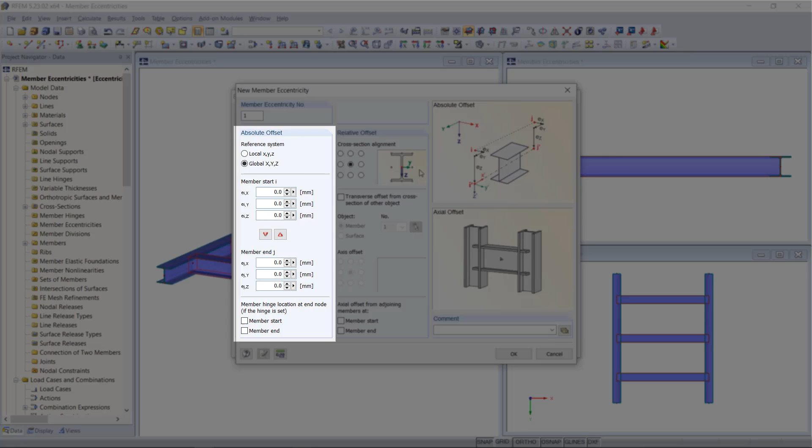So basically we have two options. We can set either an absolute offset or a relative offset. With the absolute offset we can manually enter a certain value, for instance in reference to the global axis, as the absolute distance to the previously used system lines. Let's say we want to move the members upwards in the global Z direction, so we just have to enter an eccentricity, for instance of -200 millimeters for both the member start and end.

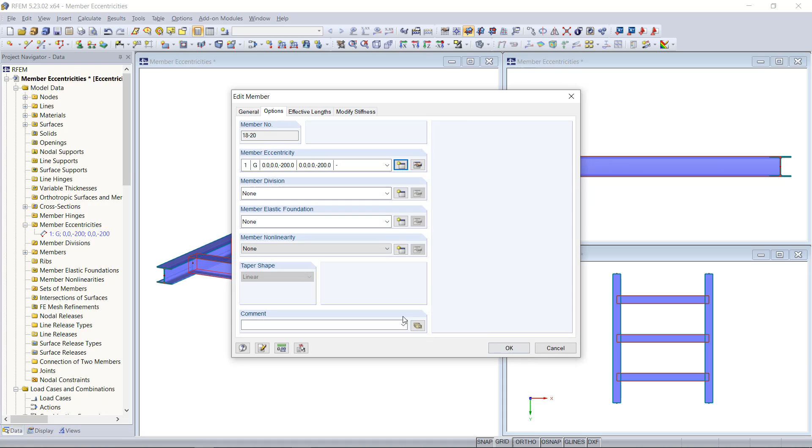Then we click OK, and now if you have a look here at the side perspective, if I click OK once again, the beams are placed upwards. In the wireframe model we can see that even better, so here you can see the connection.

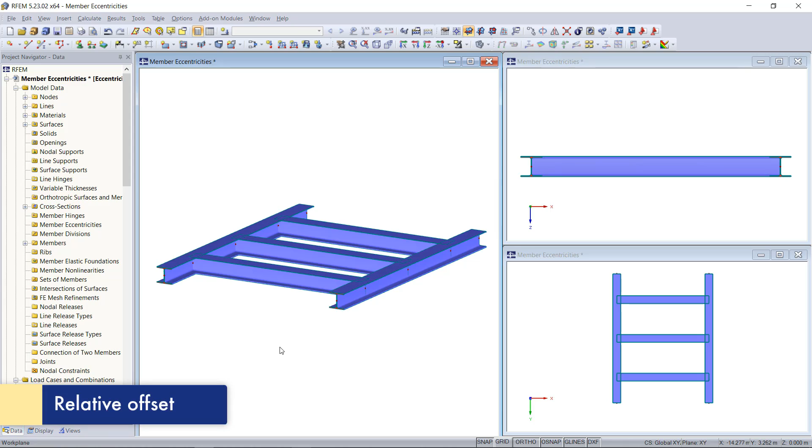The option Relative Offset allows us to create eccentricities for certain members depending on adjacent members. For the case that these members here in the middle should be flush with the other two beams on the right and left side, we can use this option. We can also enter the dialog for eccentricities directly using the project navigator, with a right click on member eccentricity, and then we choose new member eccentricity.

So by defining the point in the middle of the top flange, as shown in the figure on the right side, we can attach the middle beam members with their top edges to the other beams. So we click here on transverse offset and then choose the reference member out of the model, and then as axis offset we select the middle point down here.

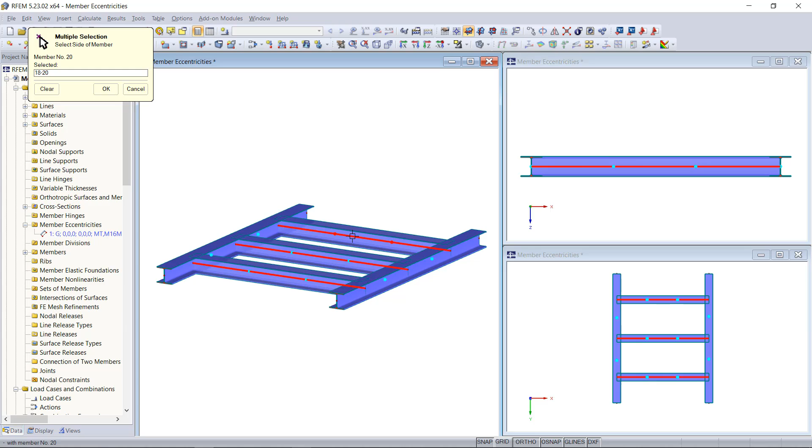So right now we have created the eccentricity, and as a next step we have to assign it to the members. We can do this with a right click and then choose assign members graphically. In order to select the entire beam member, try to click in the middle of the members, like here, and then we click OK once again. So as you can see, the beams are automatically moved and we've just created a flush connection between the members.

It's also possible to edit the eccentricities if we right click and then choose Edit. Let's say this time we need the bottom edges to be connected to the top edges of the other members. Then we click OK once again.

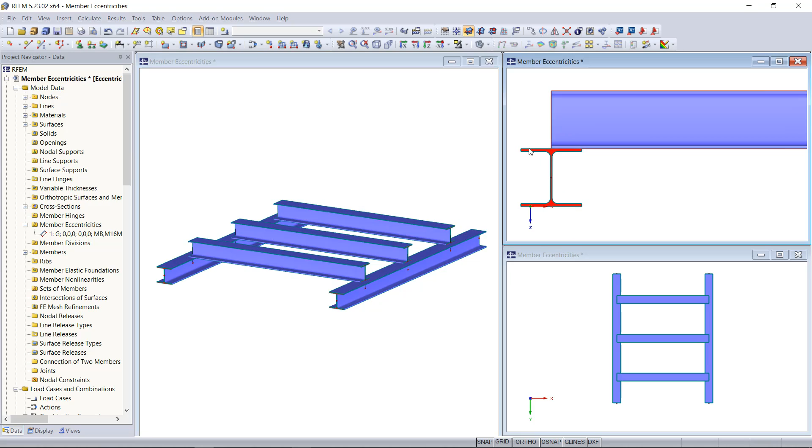In the Relative Offset dialog section, there is additionally the option of Axial Offset down here, which allows you to connect members eccentrically to the flange of members. If we want to have this for both sides, we have to click both member start and end. Now have a look at the top view, so the members are connected flush on the edges.

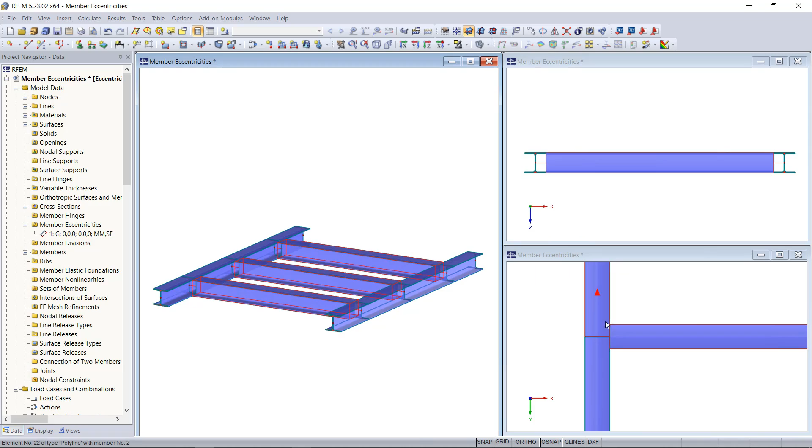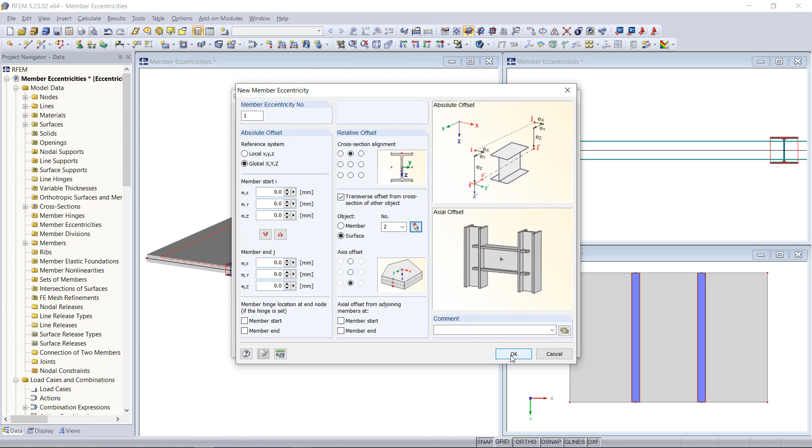We can not only create eccentricities between members, but also for adjacent surfaces. So as you can see for this model, the top edges of the two beams here should be connected to the bottom edges of the surface. So for this, we basically have the same procedure. And instead of member here, we choose surface. Then we are going to select the surface out of the model, and as axis offset we select the bottom edge down here and click OK once again. Now we also have a flush connection between members and the surface.

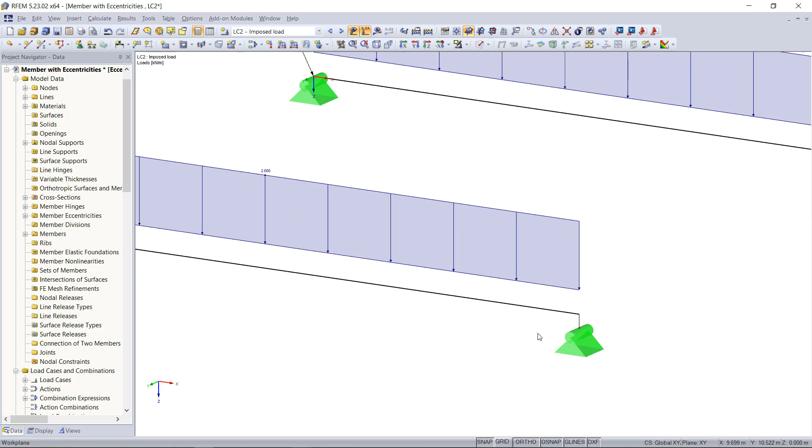I've applied a member load of 2 kilonewtons per meter for both members, and we'll run the calculation for this. If we have a look at the results now, you will notice that the first member has boundary moments and the second does not. So this is caused by the eccentricity, as in the background a connection to the original node is created. So please don't forget to consider this point.